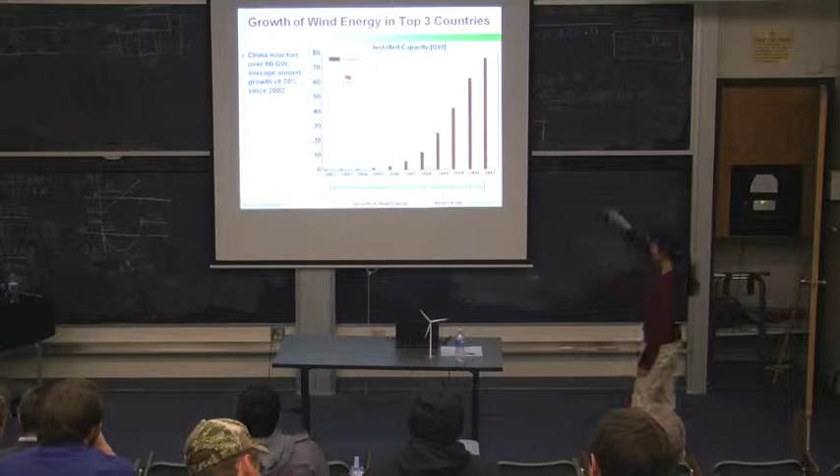Now let's take a look at the top 3 countries in installed capacity. So who knows which country has the most installed capacity? China, yes. So China in 2002 only had about half a gigawatt of installed capacity. They've had an annual growth rate of 70% on average since 2002, and now in 2013 they've exceeded 80 gigawatts of installed capacity. Now, which country do you think?

Excuse me, how do these numbers work out in terms of percentage of the entire power used in the country, or am I stealing your thunder? Oh, so I will get to that in a little bit. Is there a set of data that shows the amount of gigawatts produced per capita, or for solar PV? I don't think I have that data in particular, but yeah, that talks about the density. And China is obviously going to be lower in that regard as well. I'm thinking of the Netherlands, I saw some density numbers and they were pretty high. Yes, so I don't have the density data.

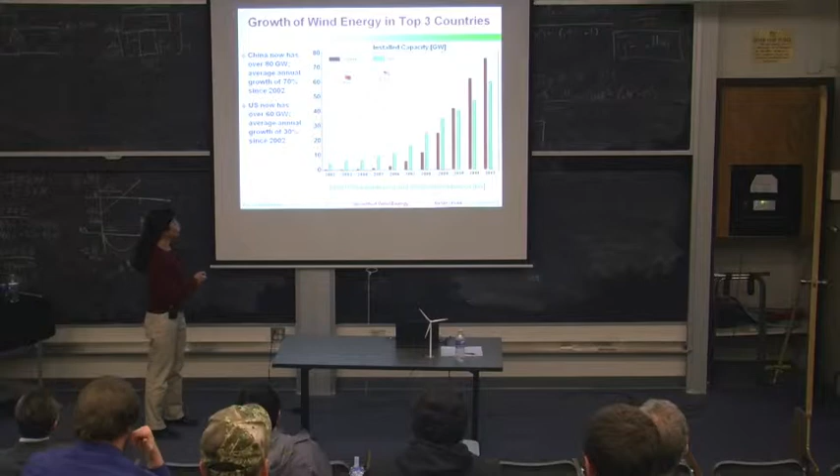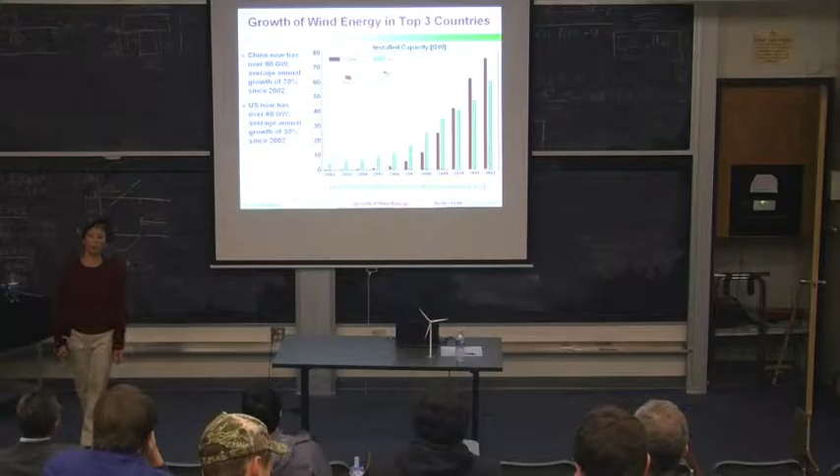Okay, so which country is second in terms of installed capacity? US, exactly. So the US now has over 60 gigawatts of installed wind capacity. We've had an annual growth rate of 30% every year since 2002. So in 2002, we had maybe 10 times the installed capacity of China. We've grown at a slower rate, so China surpassed us in 2010. Now, which country is number 3, do you think?

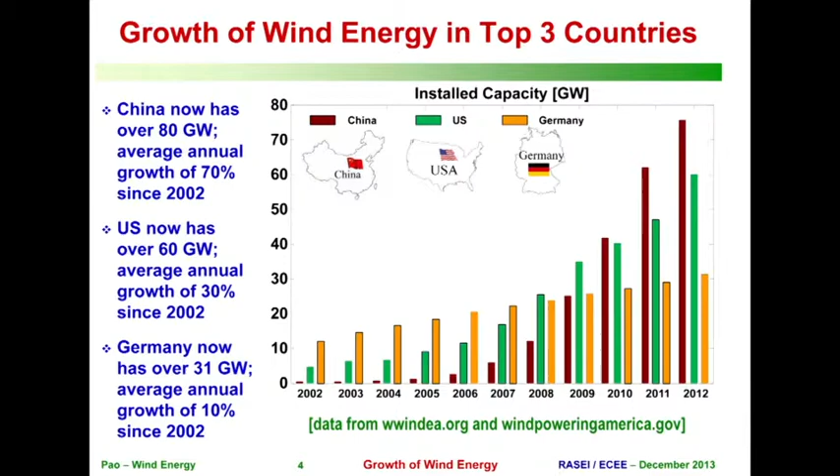Australia? No. Okay. Germany, yes. So Germany has grown still at a reasonably healthy rate, 10% annually since 2002 on average. They now have over 30 gigawatts of installed capacity. They had about 25 times the installed capacity of China in 2002, about 2.5 times what the US had. They've grown at a slower rate since then. So several European countries are like that. They had more installed capacity about a decade ago compared to other countries, and they've grown still at a healthy rate, but not as fast as some of these other countries.

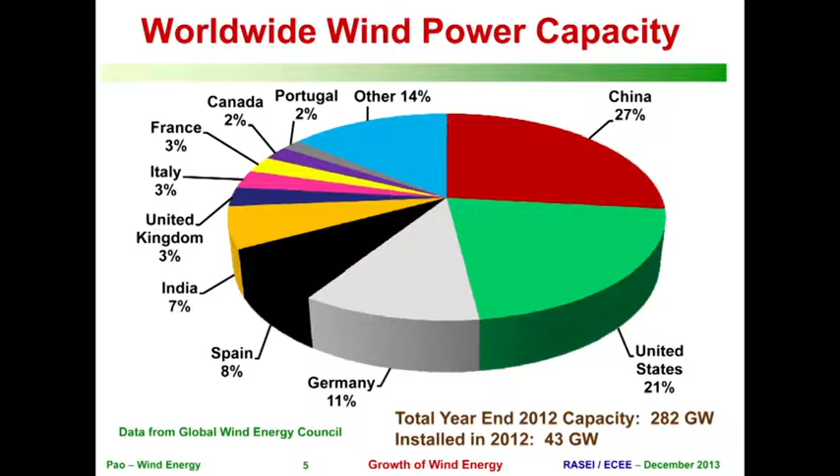All right, so maybe before I get to another way to compare, I think I have one more slide showing more countries. So after China, US, and Germany, we have Spain. India, like China, has seen rapid growth in recent years. A number of other countries in Europe, Italy, where I'll be next week, is about 7th in the world. Canada has had a number of strong years in installations recently as well.

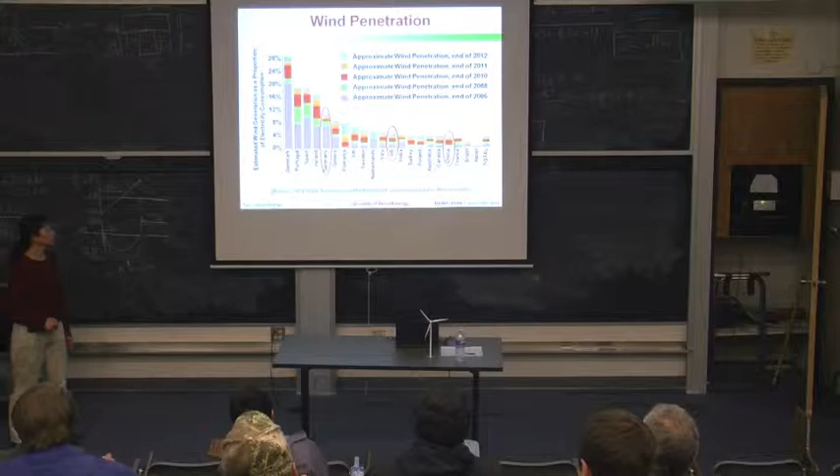So now getting to wind penetration, that's another way to compare countries. Wind penetration is the percent of each country's electrical energy needs that is being met by wind, okay? And in this regard, Denmark is by far the number one country. About 30% now of Denmark's electrical energy needs are being met by wind. Okay, so here I circled the 3 countries that we talked about earlier. China, even though it has the most installed capacity, actually has lower wind penetration. A number of European countries have quite strong wind penetration. The US is at just over 4% right now.

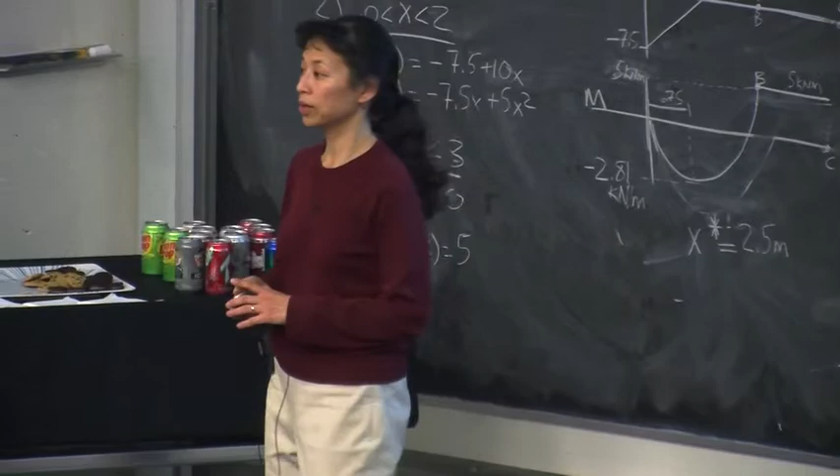Okay, so the wind industry overall is relatively healthy. There has been strong growth in installations worldwide, but the wind industry is continuing to try to drive down the cost of wind energy to try to make it more and more competitive with other sources of energy.

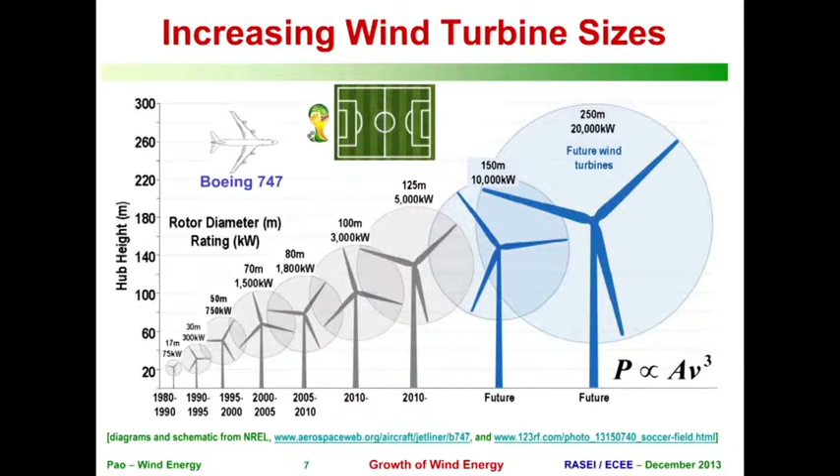So for land-based turbines, the commercial wind farms that are being installed now tend to have 1 to 5 megawatt wind turbines. These larger turbines that are under development are more for offshore wind, because for land-based turbines, in terms of the size of roads and railways, they've really reached capacity in terms of the sizes of wind turbines that they can install. So these larger turbines are being developed primarily for offshore wind.

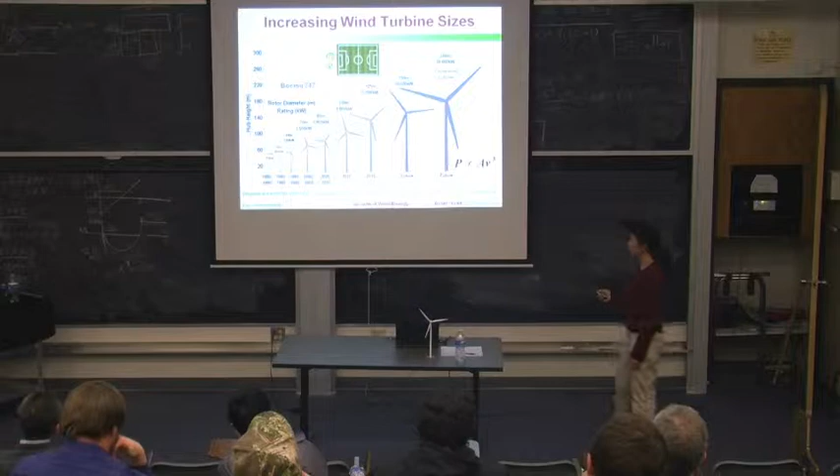Now you might say, well, why are they developing larger wind turbines if they're so hard to transport? Well, the primary reason is that the power available in the wind is proportional to the cube of wind speed, and wind speed tends to increase as you get higher off the ground, so that's one reason to go to higher and higher towers. And the power is also proportional to the rotor area, so that's another reason to go to larger turbines.

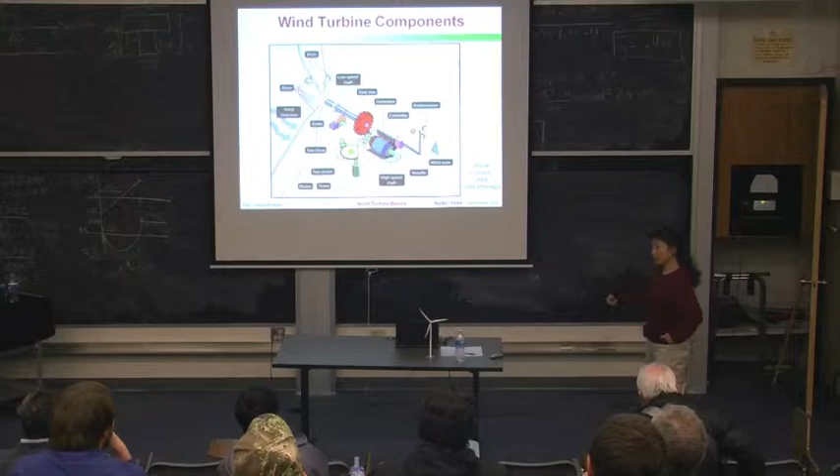All right, so let me just briefly, in a nutshell, explain wind energy. So wind comes into the rotor plane, and because of the design of the blades, that creates lift, causing the rotor to spin. That causes the low-speed shaft to spin, and that typically is stepped up through a gearbox to a high-speed shaft, which will spin the generator, generating electricity.

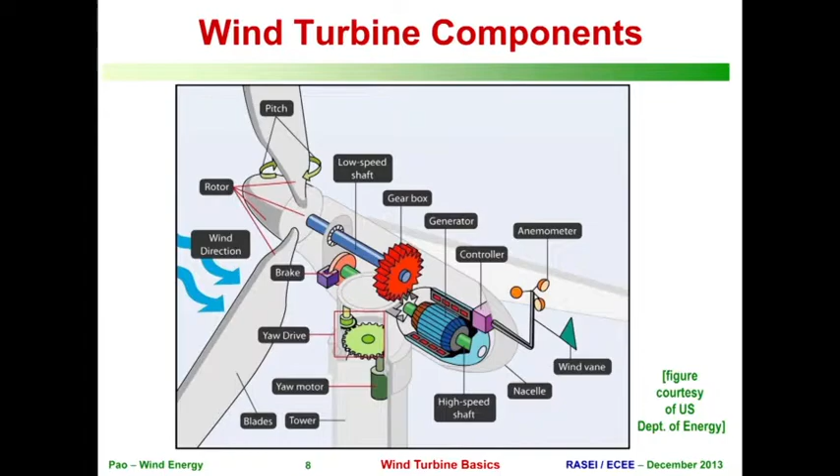So I have a model turbine, which I'll pass around just for fun. So the main components are the base, that's usually a lot of concrete, the tower, and then the nacelle, which sits at the top of the tower and holds the generator, and then the rotor, which includes the 3 blades and the hub at the center. And so this is maybe a 1/200th scale turbine compared to a megawatt wind turbine. I have other ones, yeah.

So Lucy, can your talk cover at all these turbines without gearboxes? Yeah, so I'm not going to talk about direct drive. But Sandy Butterfield gave a very good RASEI talk, which I think was recorded, so it should be online, about direct drive. I'm wondering, for your presentation, are you taking them up? No, I'm not going to talk about that.

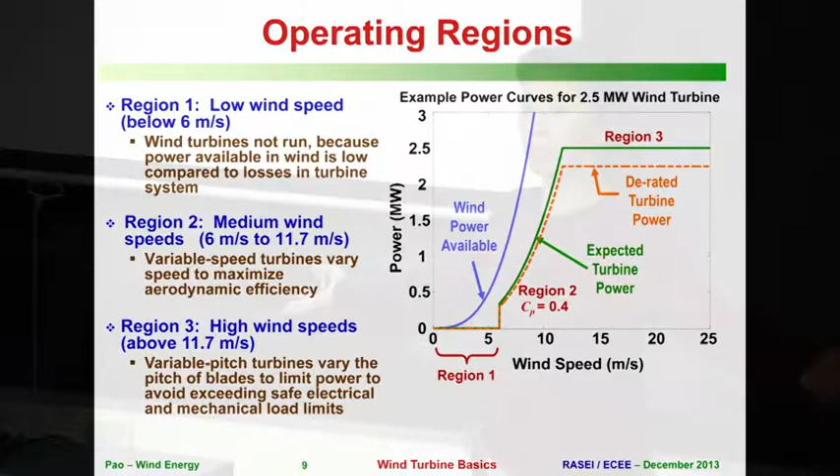Now, as wind speeds continue to increase, we will move into what's known as region 3, or above rated operation. So now once there's enough wind speed, we're generating 2.5 megawatts of power. And we don't want to generate any more power because we'll burn out the generator. And so in region 3, what's done is to pitch the blades to let more of that wind go by. So we're shedding some of that wind so that we can maintain the power capture at the rated power of the turbine.

And we also try to pitch the blades to additionally try to mitigate structural loads on the turbine, to reduce maintenance issues and extend the lifetime of the turbine, all to try to reduce the cost of wind energy. Now, this is typically how wind turbines are operated. So in region 2, you try to maximize power capture. And in region 3, you're regulating the power at that rated power of the turbine.

So effectively, in both these operating regions, region 2 and region 3, you're operating at the maximum power that you can be. So here, you're trying to maximize power, and here, you're at the maximum power, rated power of the turbine. And so the concern with having more and more wind power on the utility grid is that wind turbines typically can't increase their power to help address electrical load issues that might occur on the grid.

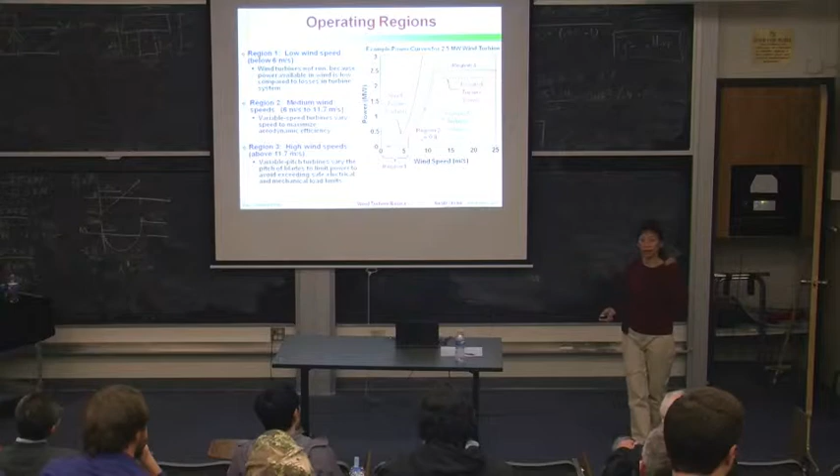And so what I'll talk about later on in the talk is, can we or should we derate the power being captured by the wind turbines so that then there's headroom that allows wind turbines to respond to utility requests for more power to try to balance the grid. Right? So before I talk more about what's called active power control of wind turbines, let me talk about the operation of the utility grid.

I'll first talk about it more generally, and then talk about some of the challenges as we increase renewables, in particular solar and wind, on the grid. And then I'll talk about some of the solutions that can try to address some of the issues. Okay, so just a very brief history of power systems. As power systems were built up, typically there's power that's generated at a power plant, and it's transmitted, often over long distances, to a local power substation, which then distributes the power to the customers.

Okay? Now, most traditional power plants have what are called synchronous generators. And as power systems were built up in different geographical regions, ultimately they were connected for improving the reliability, so that if one region had greater electrical demand, the power systems from other regions could help provide that generating capability.

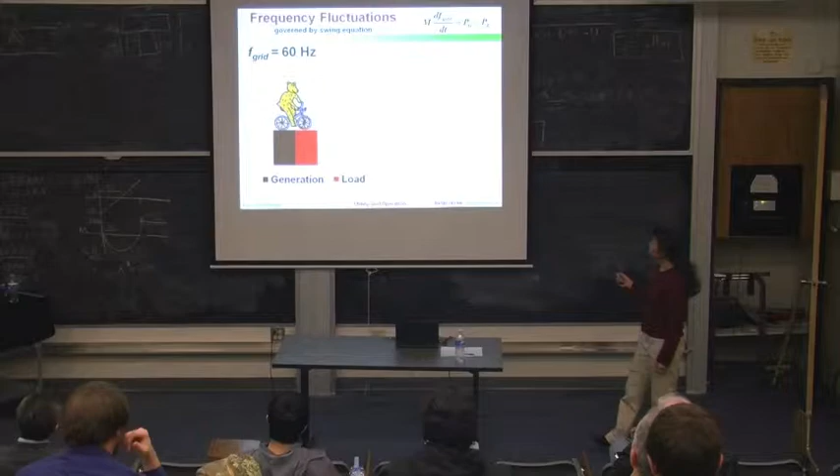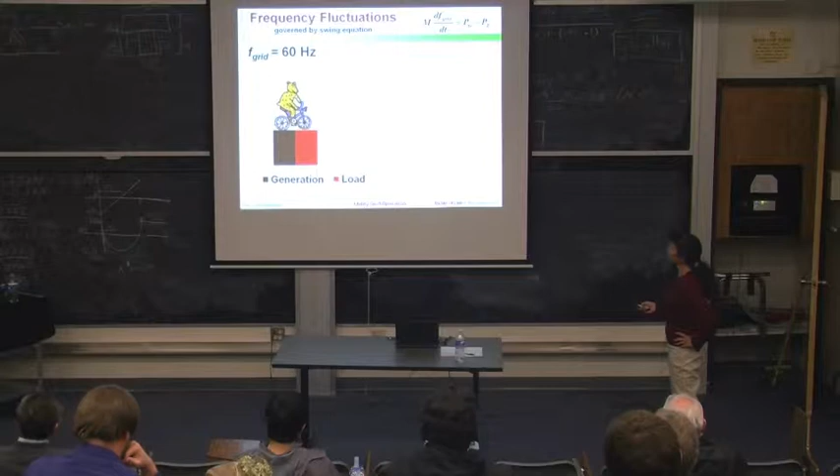So the grid frequency fluctuations are governed by the swing equation. PG is the power being generated. PL is the electrical load. So we want the power generated to equal the electrical load. Okay, so when it is equal, Mr. Conventional Bear is happily pedaling on a flat surface, and the right side here is 0, and so the frequency of the grid is constant at the desired frequency, which in the US is 60 hertz, in Europe is 50 hertz. M here is proportional to the inertia of the system. So we'll talk about that in a bit.

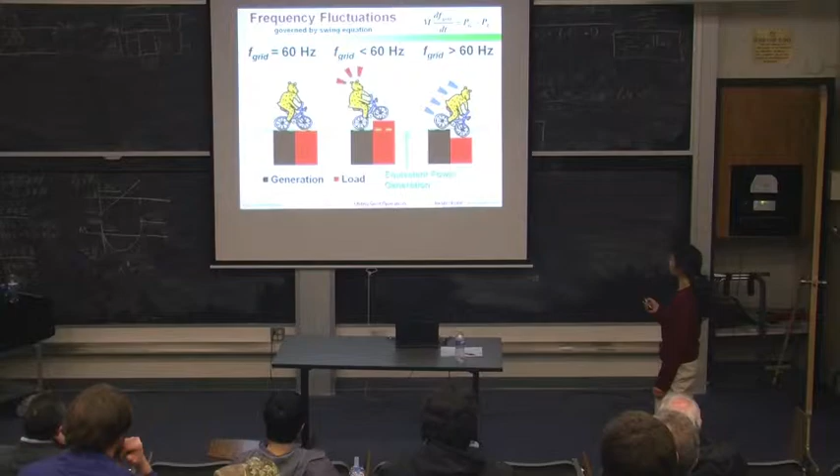Now, if electrical load suddenly increases relative to the power generated, then this right side becomes negative and the frequency drops. Mr. Conventional Bear has a harder time going uphill here, slows down. Now, if the electrical load drops relative to generation, then this right side is positive and the frequency of the grid will increase above 60 hertz.

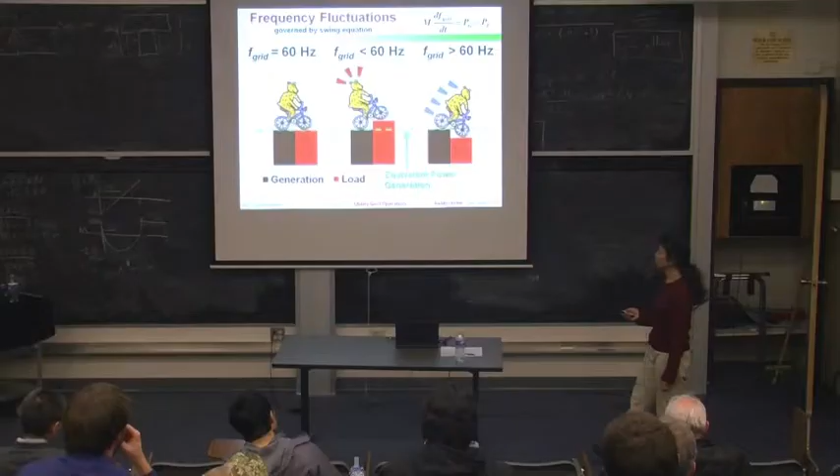Now, it's probably more common that electrical load increases, or sometimes a generating source will have a fault and drop off the grid. And so oftentimes we want to respond to events such as that. So if we have a loss of generation event, PG drops and the grid frequency will suddenly drop.

Now, how fast this frequency drops depends on this system inertia. The larger the system inertia, you can think of dividing this equation by m, so this comes to the right-hand side. So the larger the system inertia, the smaller the magnitude of this slope in this drop of frequency.

Now, primary frequency response is this first period where the synchronous generators, via their governors, provide an automatic response to try to arrest the frequency drop and then bring it back up to some steady state. And this all occurs in about 30 seconds.

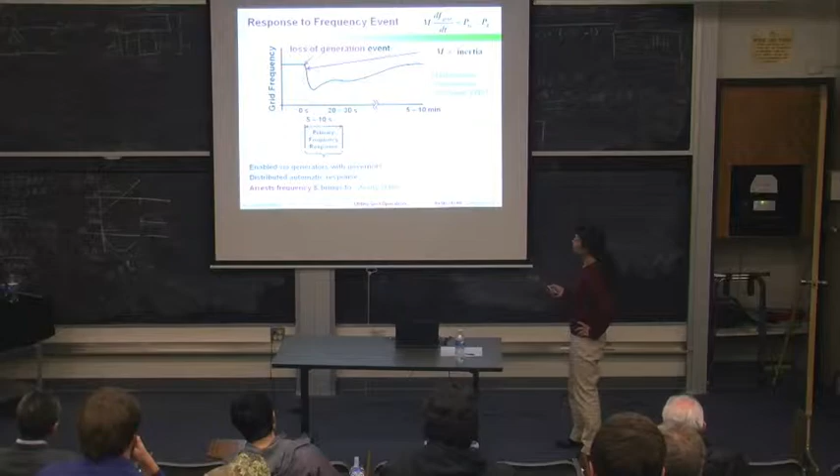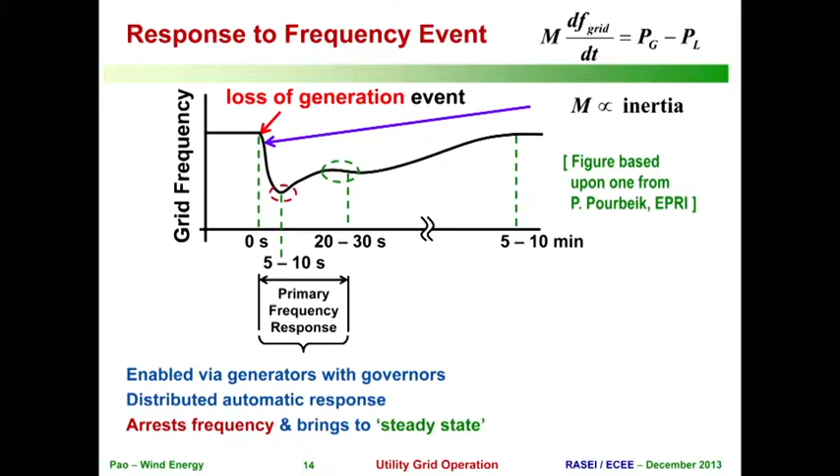Now, once we complete the primary frequency response, then it's transitioned to what's known as a secondary or tertiary frequency regulation period, where there might be automatic power commands generated through an automatic generation control, or manual power commands generated. And the goal here is to bring this frequency back up to the 60 hertz in the US or 50 hertz in Europe.

All right, so let me talk a little bit about primary frequency control and secondary regulation. So in the industry, this is typically referred to as primary frequency response, but in electrical engineering, we talk about frequency responsive systems, and so it can get pretty confusing. And so I like to refer to this as what we're really doing is primary frequency control. So that's how I'm going to refer to that for the rest of the talk. I might also call it droop control.

So we're essentially trying to arrest the frequency drop and bring it back to some steady state here. And this is for synchronous generators provided via governors. And the governor response is characterized by what is called a droop curve. That droop curve is typically fixed for the mechanical synchronous generator machine.

So what a typical droop curve looks like is as follows. This is a plot of the percent change in commanded power as a function of grid frequency. And so if the grid frequency is close enough to 60 hertz within this deadband, then everything is happy. Nothing actually is activated in this primary frequency control.

But if the frequency deviation gets large enough, we move out of the deadband. So in the US, it's common to see deadbands of plus or minus 15 millihertz or plus or minus 30 millihertz, kind of in that range.

And so if, say, we have a sudden loss in generation, grid frequency will drop, and if it drops enough, then we come to this droop region where it's going to command an increase in power from this generator to try to arrest that frequency drop. So essentially it's a proportional control in this region.

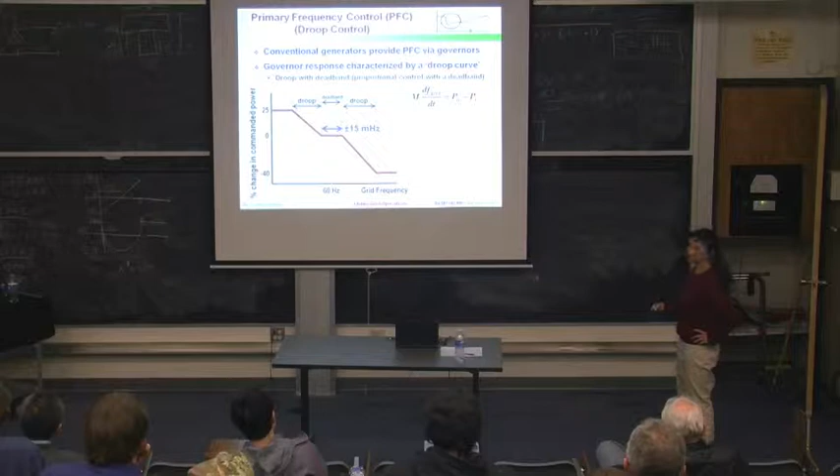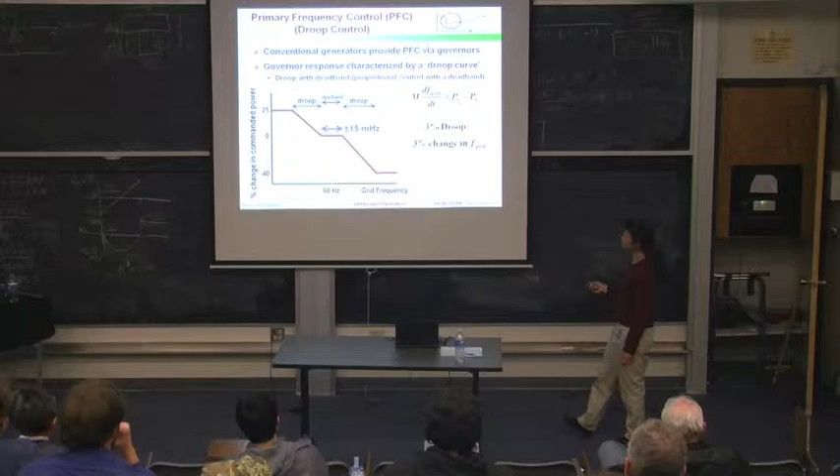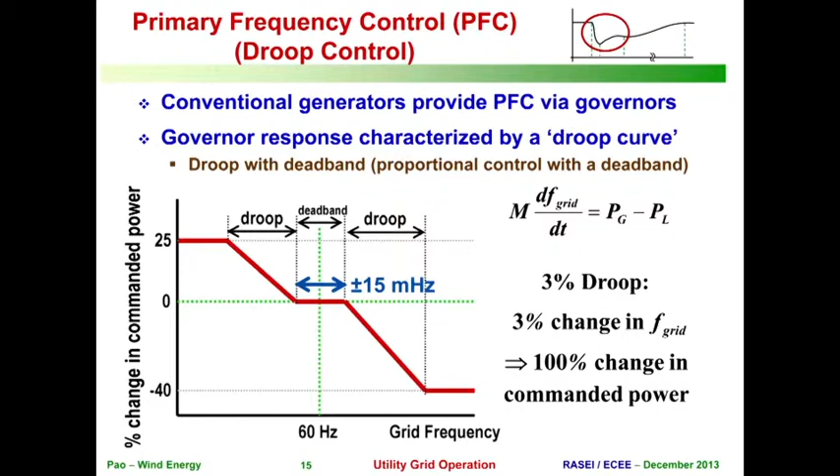So because this is being plotted as percent change in commanded power as a function of grid frequency, the smaller the percent droop, the more aggressive the droop curve. So a 3% droop means that a 3% change in grid frequency leads to a 100% change in commanded power. So if you have a 1% droop, then a 1% change in grid frequency will lead to a 100% change in commanded power. So it's more aggressive.

All right. Now, secondary control is a little more complicated to explain. There are many different ways, and different details in different utility systems. So I'm not going to go into as much detail here. But the goal here is that after the primary frequency response, we want to bring the grid frequency back up to 60 hertz, say, in the US.

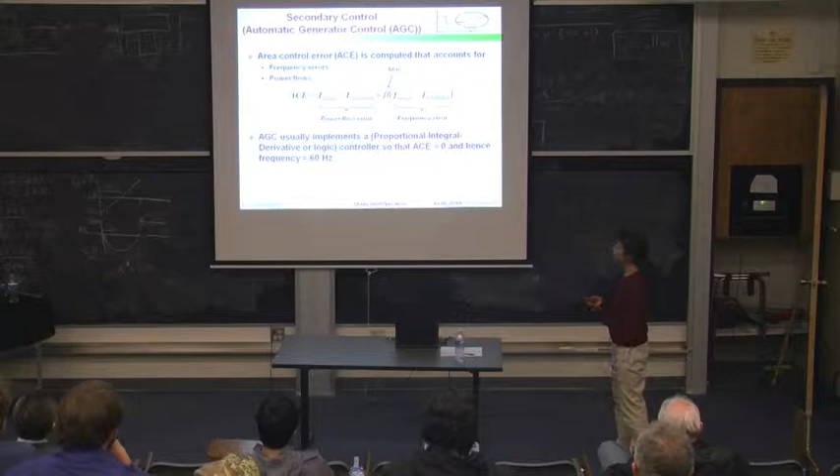And what's typically done is, based on measurements, an area control error is computed, and it's a function of frequency errors as well as power flows. And so this ACE signal is a function of this frequency error. Beta is a gain that's often referred to as a frequency bias. And this is the actual interchange power flow, and this is the scheduled interchange power flow. And so if there's an error there, that's accounted for in this area control error.

And so the automatic generator control generally implements a pretty simple control algorithm, often a proportional integral derivative controller or a logic controller, to drive this ACE signal, the area control error signal, to 0. And so that will essentially drive the frequency to the desired frequency of 60 hertz. Usually, the automatic generator control sends a new regulation power command every 2 to 4 seconds.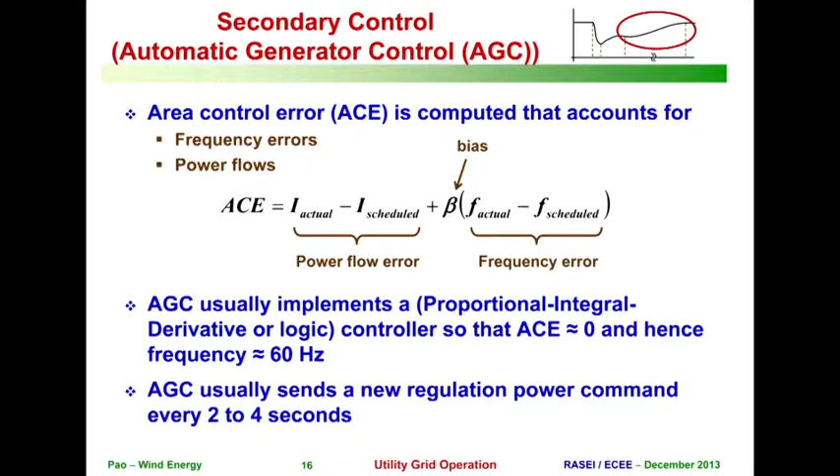Right? So to recap then, we want electrical generation to be equal to electrical load. And traditionally, what's done is the electrical generation is controlled to follow the varying load. The utility typically doesn't know when you're going to use your different appliances or lighting, or when that factory is going to go into full production and such. And it's just trying to adjust generation to meet varying demand.

So in order to do that, it has to have some operational reserves. It can't always be operating at maximum output. Okay? And if there's imbalance between electrical generation and load, that will lead to frequency variations on the utility grid. If there are large imbalances, that will lead to large frequency fluctuations, which can lead to unwanted under-frequency load shedding, so just dropping electrical loads, or even blackouts.

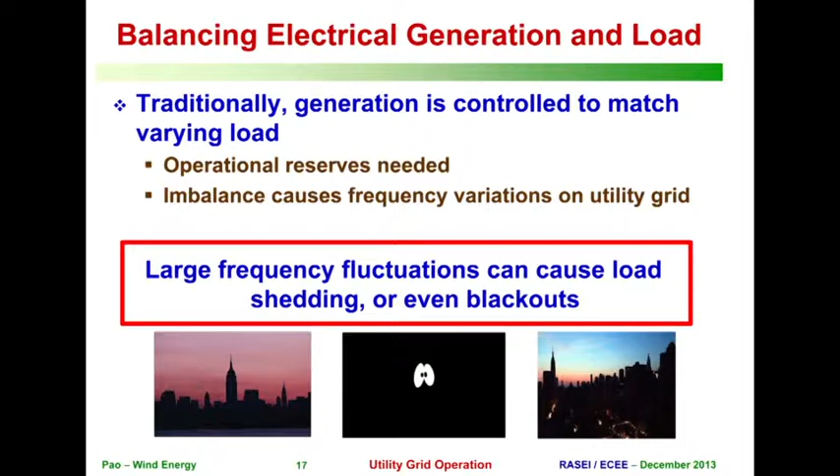All right, so now let's take a look at how utility grids try to vary generation to meet load. So a typical system load across a 24-hour period, across a day, might look like this. From midnight to 5 a.m., there's not as much load. And then as people get up, turn on their lights and appliances, there's more load during the day. And then in the evening, as people go to bed, load drops again.

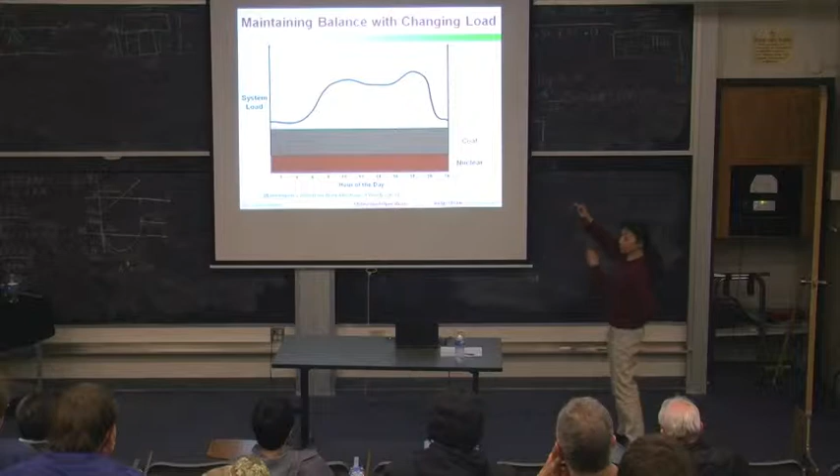So a lot of utilities might have some amount of nuclear, which they operate. They might have some amount of coal. Okay, so ideally, they'd like to just have nuclear and coal be operating at some fixed rate of energy production. There might be some hydro, and then oftentimes gas is the most flexible, so that's the one that gets cycled up and down to try to meet increases and decreases in demand.

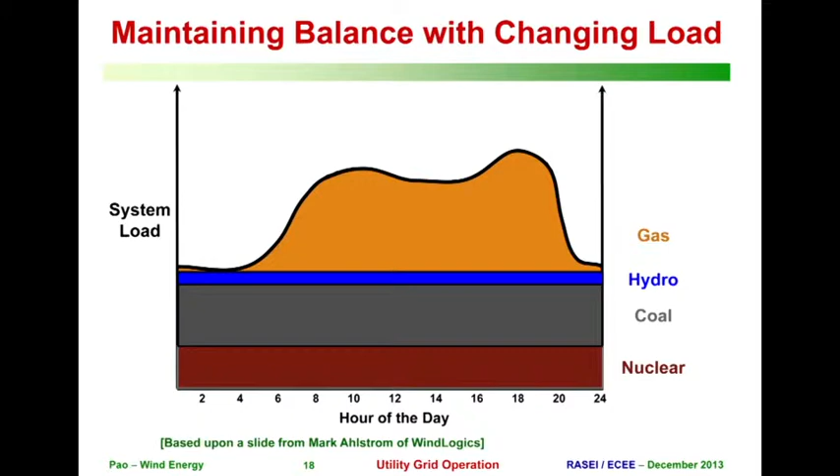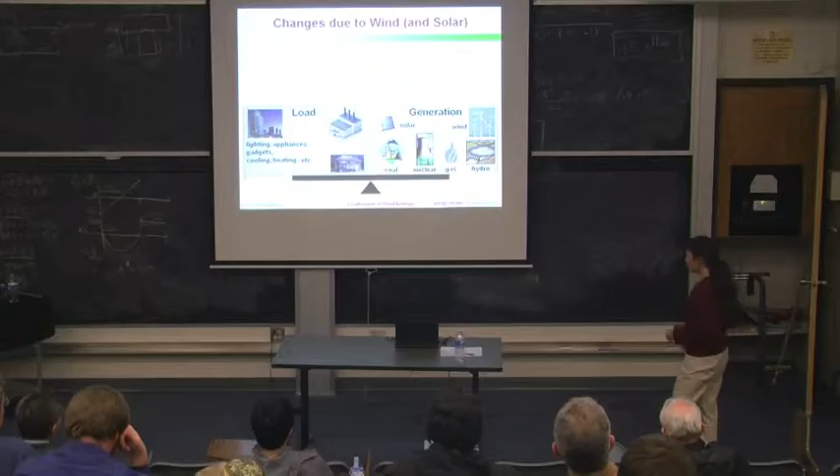Now, what happens when we have increasing amounts of wind and solar in the generation mix? Well, wind and solar are intermittent generating sources. Wind energy is only available when the wind blows. Solar energy is only available when the sun shines. And so people are worried that as more and more wind and solar are integrated onto the utility grid, these intermittent sources are hard to predict, hard to control. It's going to be harder and harder to control this generation mix to meet variable load. Okay?

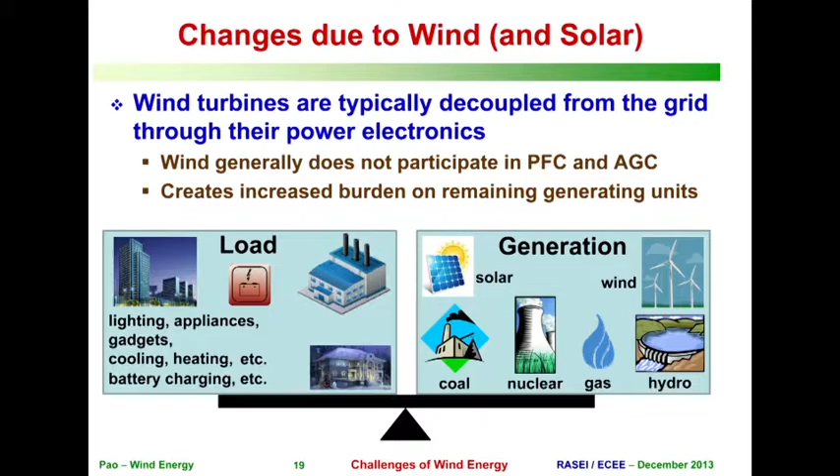And wind turbines typically, and similar can be said about solar, are decoupled from the utility grid through their power electronics. So they're usually not asked to provide primary frequency control or secondary automatic generator control. And as such, as more and more wind and solar are added to the generation mix, the remaining traditional sources are asked to do more and more of the balancing work. So the remaining sources of energy are becoming a smaller and smaller percentage of the generation mix, but yet they're still asked to do all that balancing. And so there's worry that it's just going to be too hard to balance generation with load.

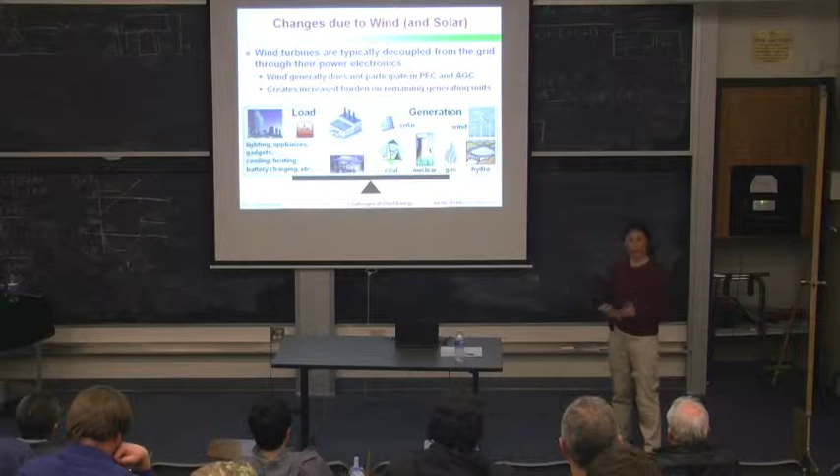In particular, also, if we look at more and more electric vehicles on the grid and the peak demands that might come about. So as there are more electric vehicles, say 1 million electric vehicles, at the end of the day, people have commuted to work and back, they all plug in their electric vehicles, and there might be this sharp increase in load that might be difficult to meet. And so there are concerns over the reliability of the utility grid from many different viewpoints.

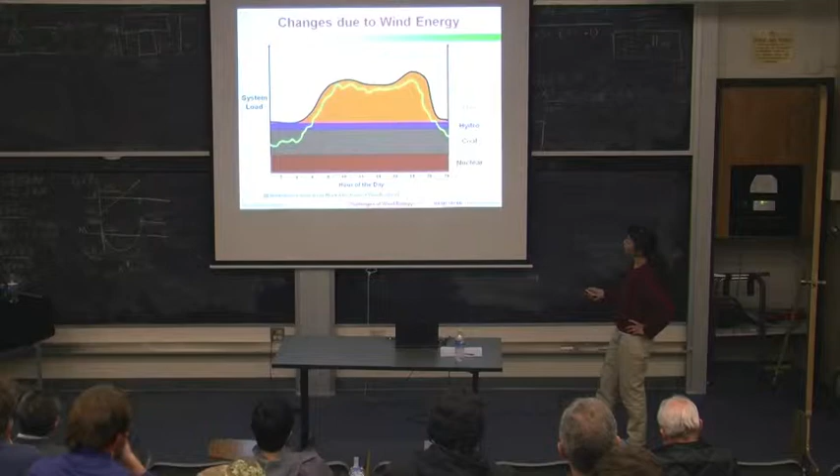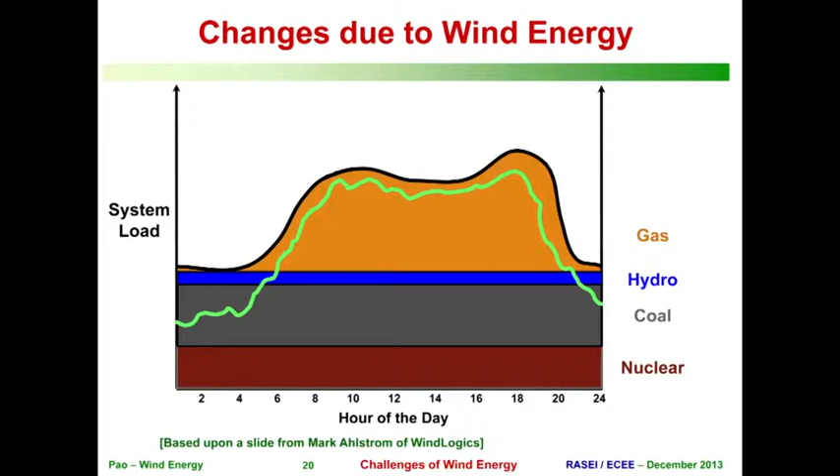Okay, so if we look at what we had before, wind typically blows harder at night in most regions around the world, and so there's a bigger decrease here and maybe a bigger decrease in the evening, and maybe less so during the daytime. And because of this decrease, now we're asking hydro to cycle, and we're also asking coal to cycle, and if we increase wind penetration further, we might ultimately need nuclear to cycle. And so this is some of the concern, that it's difficult for coal to cycle rapidly to respond to changes in system load.

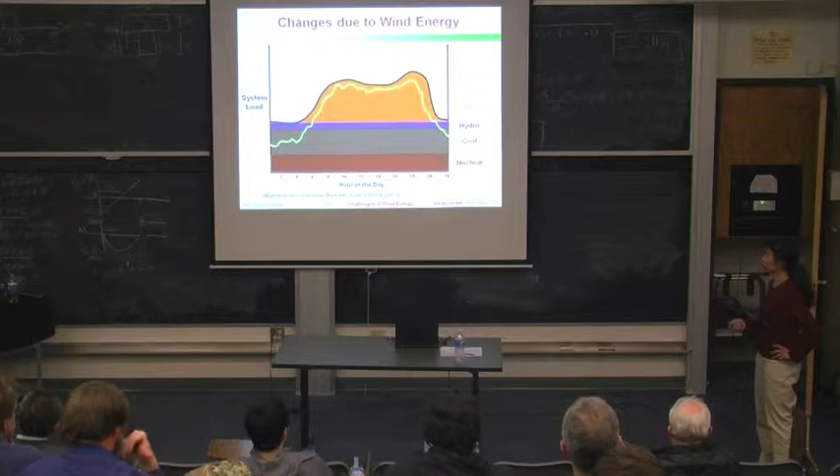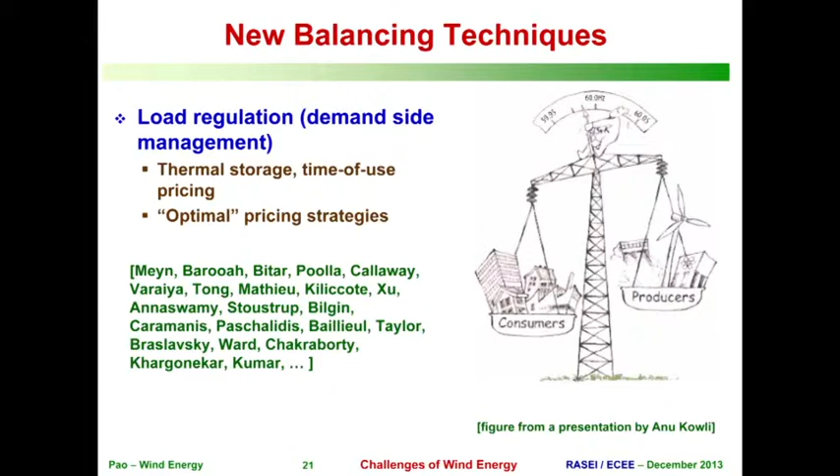All right, so what are some methods that we can try to address these issues? So one method is to try to do load regulation, or what's also called demand response or demand side management. Essentially, kind of predict what might happen during the day. So if it's predicted to be a really hot day in the summertime, you might, while it's still early in the morning and not a lot of demand, you might start to cool down buildings more than you would at that time of day, but just use that thermal inertia of the building, cool it down.

Most people can't feel the difference in a few degrees, and so then the air conditioning might not be required during the peak part of the day, and so that helps then to reduce that peak demand and help the reliability of the grid. There's a number of people in our field that have looked at demand side management, time of use pricing, and they've also looked at optimal pricing strategies so that users will do the right thing and try not to increase the electrical load at what would otherwise be extreme peak times.

Another way to try to address some of the issues of increasing renewables in the grid is to try to develop effective energy storage techniques. Unfortunately, at the current time, the most effective electrical energy storage methods are really expensive, so it's not really being embraced as the solution just yet. People in our field, there are some that have looked at better modeling and control of storage options, also looking at where do you place the storage at different locations on the utility grid for maximizing effectiveness.

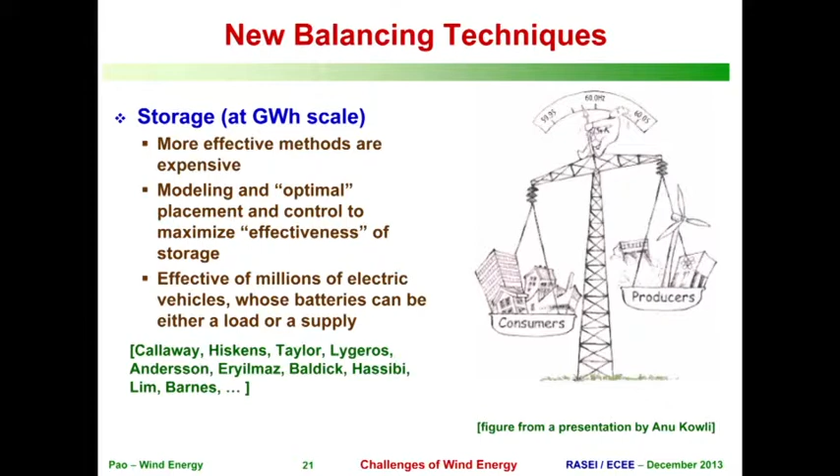They've also looked at, suppose that we do have 1 million electric vehicles. While it can be viewed as a load, they all have batteries, so they can also be viewed as a supply. And so how can we, if we had smart meters and distributed controllers on these electric vehicles as they get plugged in at the end of the day, as long as the user doesn't care about their vehicle being charged until the next morning, then let the utility decide how to charge that vehicle, possibly drawing energy from the vehicle if needed, when the user doesn't necessarily need that energy.

And finally, what I'd like to spend the next little bit talking about is active power control of wind power plants in particular. And you could do the same for solar as well. So the idea here, I already alluded to earlier, is that instead of operating wind turbines and solar at their maximum power capabilities, let's derate them, say, to 90% or some level, so that we leave ourselves some headroom so that we could increase power or decrease power to respond to utility grid requests to help balance the needs there.

So there's been more work that has been done in developing active power control methods for wind turbines. It's a relatively newer area of research in the solar community, but Professor Maksimovic and Andy Hoke are actively looking at active power control of solar as well.

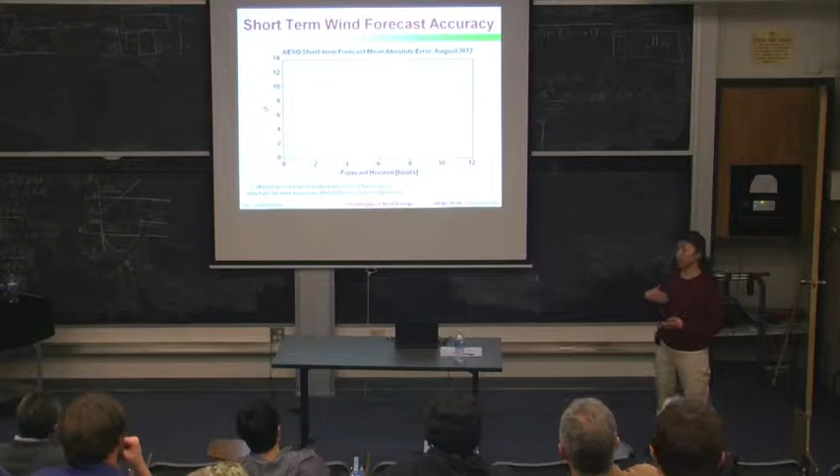Okay, so before I talk more about active power control of wind in particular, I just also want to make a brief comment that wind forecasting has been improving. This is largely being done by the atmospheric science community, and they have been developing better and better methods of wind forecasting such that, as these utility grids change the way that they operate to be more flexible in planning sort of 5 minutes ahead, in shorter time increments ahead, that, along with better forecasting, will mean very accurate forecasts and better reliability in terms of scheduling wind that will actually be available and be provided.

Okay, so let me now talk just a little more about active power control of wind turbines. Can we actively control the power of wind turbines, not always to be at the maximal level, but to be at some lower level, and then can we control the power of wind turbines to follow a desired power reference so that we can help stabilize the grid and possibly make it more reliable?

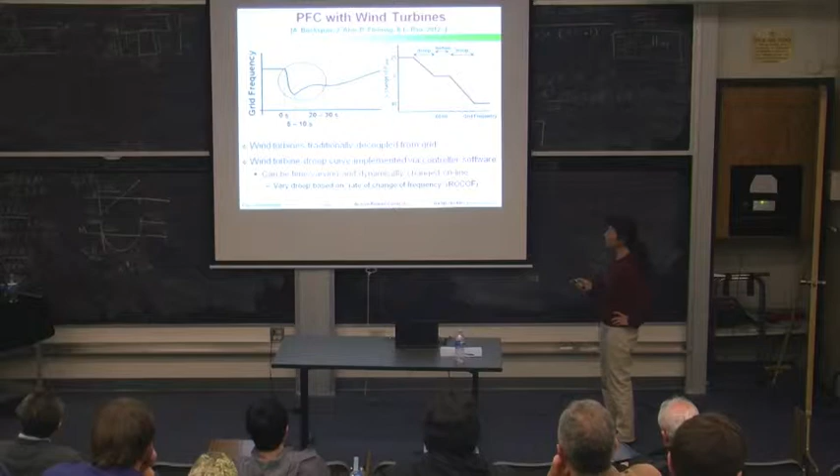Okay, so wind turbines, as I mentioned, are traditionally decoupled from the utility grid, so they're typically not asked to provide primary frequency control or secondary regulation. But with wind turbines, we can implement a droop curve synthetically via software and ask a wind turbine essentially to respond to frequency deviations. Okay? Now, in fact, for wind turbines, we have more flexibility. So with synchronous generators, they typically have a fixed droop curve that's tied to the physical characteristics of that synchronous generator. But for wind turbines, we can design different types of droop curves.

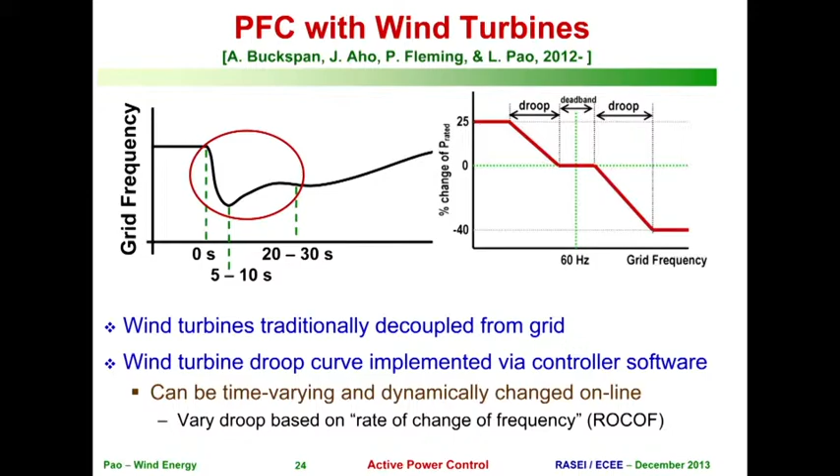In fact, what we found is dynamic droop curves, time-varying droop curves that change their characteristics over time, in particular as a function of the rate of change of frequency on the grid, tend to actually be very effective. So just as an example, if the rate of change of frequency in the grid is 0 or very little, we might use a very

non-aggressive droop curve. So here we have two static droop curves. Static droop curve 1, which is this red curve, is less aggressive. It has a 5% droop with a 50 millihertz deadband. And then we have a more aggressive droop curve, static droop curve 2, that has a 2.5% droop.

And what we do for our dynamic droop curve is we interpolate between the two based on the rate of change of frequency. So if the rate of change of frequency is 0, then we use the less aggressive droop curve. And if the rate of change of frequency starts to increase in magnitude, so it becomes more negative here, so we have a drop in frequency, then we interpolate between the two static droop curves to generate our dynamic droop curve response, and we can go more and more towards the more aggressive droop curve depending on this rate of change of frequency.

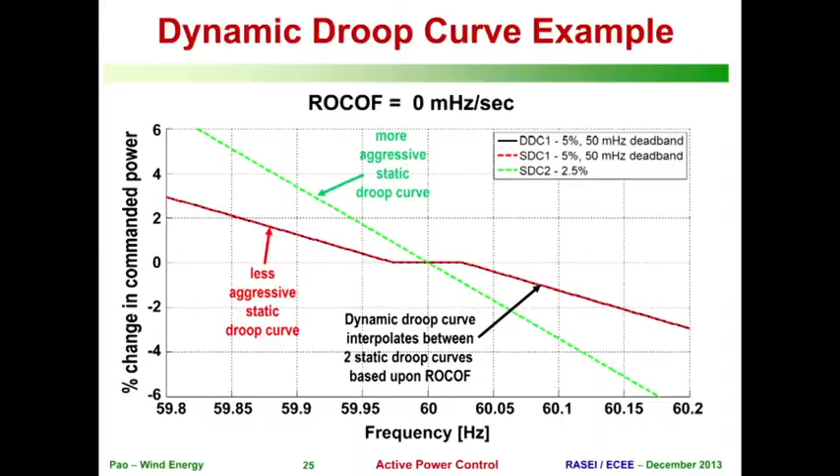So what are you controlling to change the droop curve? The pitch of the blades? So the droop curve takes the frequency input. If the frequency drops, then we will have a commanded power. That commanded power is sent to our control system for the wind turbine, and we change both pitch and generator torque to try to follow that power reference.

If the power reference is not changing too rapidly, we can typically follow that just with pitch alone. If the power reference changes more rapidly, generator torque has a faster response, so then we'll use that to follow the power reference. All right.

Mike? So you went to the 50 millihertz deadband. Do you have that degree of freedom? Yes, we do have that degree of freedom in terms of what we're asking out of our wind turbine. But the grid doesn't constrain you? The grid doesn't constrain us. Usually for synchronous generators, there's just some fixed droop that's tied to the physical characteristics of that synchronous generator. For wind turbines, they're typically decoupled from the utility grid due to their power electronics, but we can ask them to provide a primary frequency response through a synthetic droop curve, essentially.

So we've run grid simulation results to see how well wind turbines can respond to grid events using a dynamic droop curve. Here we use an IEEE standard grid model. In the simulation, 5% of the generating capacity suddenly drops offline at time equal to 1,000. So when there's no wind in the mix, this is the response, with all conventional generating sources.

Now, if 15% of the utility generating sources is now wind, but wind, as it traditionally has, does not participate in primary frequency control, then we actually have a worse response. The frequency drops to a lower nadir and comes back to a steady state that's further away from 60 hertz. This makes sense because only 85% of the generating resources are trying to respond to this grid event. Wind is not trying to help there.

Now, if we let wind participate with the dynamic droop curve, then we can actually do better than when there was no wind on the grid. So we're arresting the frequency earlier and bringing it back to a steady state that's closer to 60 hertz. And this then leads to the secondary control having an easier time.

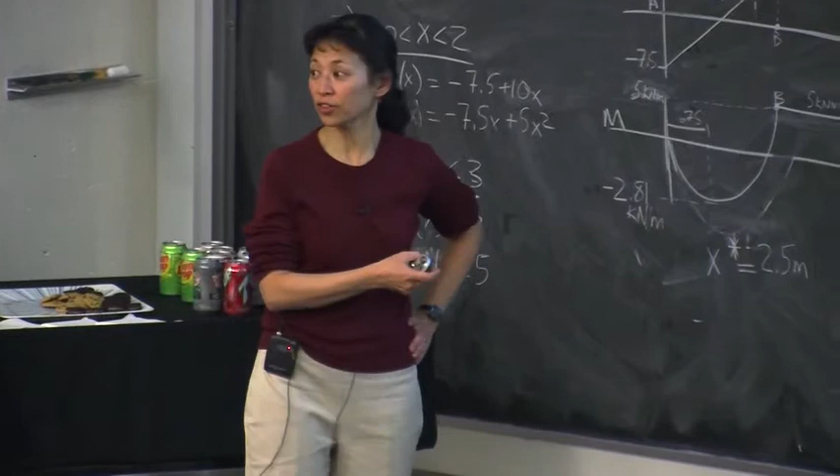One more. To give me some sense of how significant this improvement is, can you quantify what is the negative impact of 100 millihertz or 200 millihertz droop from the 60? Right. So it depends on the particular grid and the utility, the generating mix on it, in terms of how low is too bad. But typically there's some threshold below which you'll have load shedding, and that might lead to blackouts. So there's almost a catastrophic change.

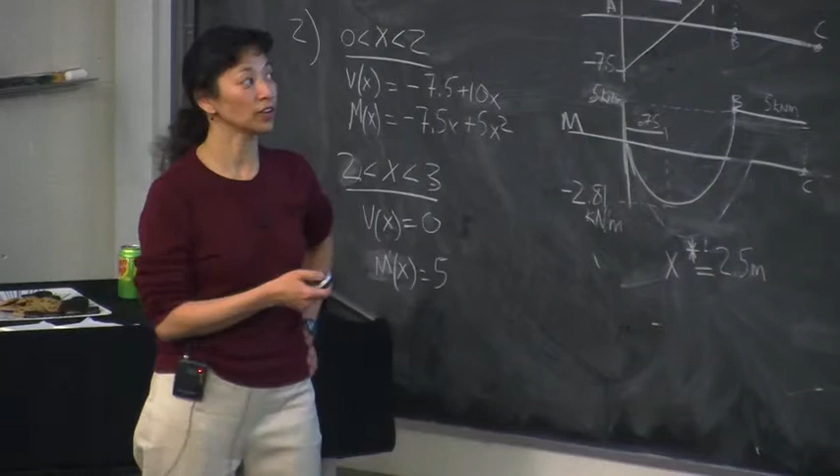Yeah, so there's definitely some threshold at which point there is a catastrophic change. And so you want to arrest this as much as possible. And this is significant enough with respect to that. Right. And this is only 15% wind penetration. What we found in more simulations is higher penetration of wind participating will actually lead to even better response.

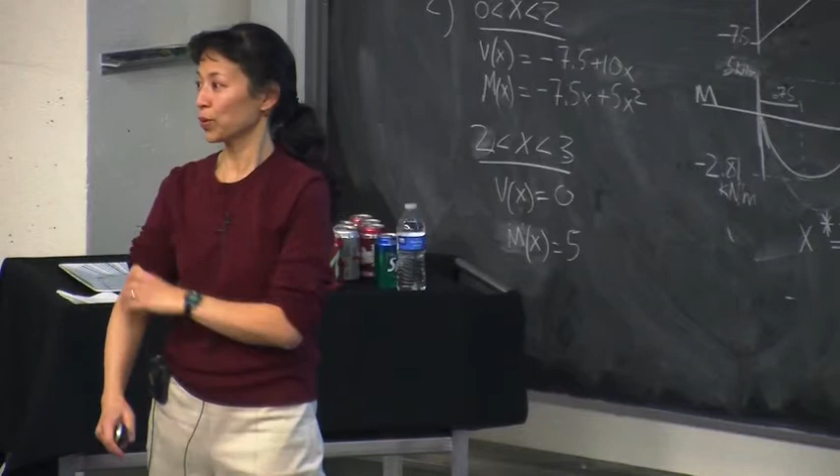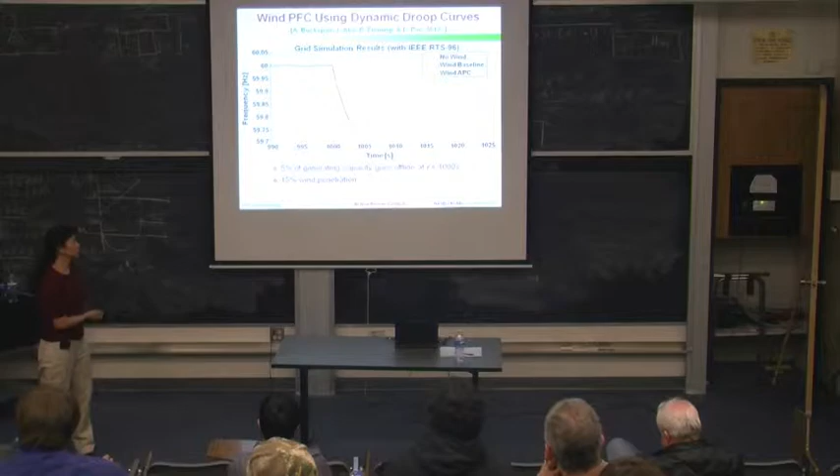Okay? So when we did these grid simulations, we were very excited. But one thing we had worried about is we're asking our wind turbines to respond to these power reference requests and possibly asking them to pitch more and do more. We were worried that that would lead to larger structural loads, and so we thought that might end up being the cost of providing the service. But it turns out that in general, the structural loads are actually decreased.

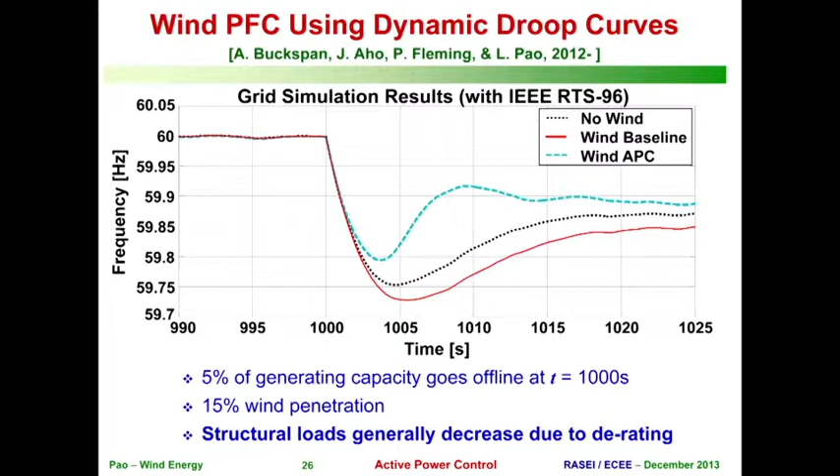Because most of the time, you're going to be operating at a derated operation, so you're going to have lower loads than usual. And only occasionally, when these events occur, are you asking them for more. So at maximum load, you have the optimal angle of attack where you have maximum lift, and that also means maximum force on the structure, and you back off from that. We back off a little bit, so we have lower loads in general in that derated operation. And only when we're responding to events are there occasionally slightly more loads.

Yeah, Frank? Yeah, but I'm a grid operator, and I want to get paid for every watt I can generate. Yes, so that's an issue, right? So you derate to 90%, you're going to get less revenue for the power production. And so this is definitely an issue going forward, because right now, generating sources are not paid for providing responses to grid events. And so in the future, I think the incentive should be that they are paid for providing the service. And then that could even it out economically.

I have a similar question. Do these droops actually happen often enough that it's justifiable to derate your wind turbine full time so that you can compensate for these droops? So that's another good question. You could try to predict when there might be a peak demand. And so you might run closer to maximum power most of the time, and then if you predict that you might need that headroom, then you derate, so you're only derated for some shorter amount of time before events.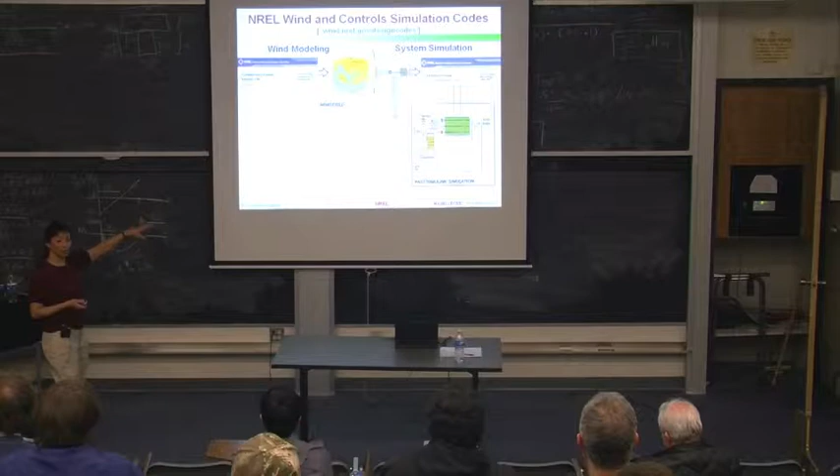All right, so moving forward. I just showed some grid simulation results. We have done detailed wind turbine response results as well to assess the typical structural loads incurred when providing derating, primary frequency response and secondary response. We use NREL's codes to help us evaluate wind turbine response. These codes are freely available to anyone that wants them.

They have a TurbSim code that generates realistic wind fields, which we can then pass through the wind turbine in another code known as FAST, for fatigue, aerodynamic structures, and turbulence, that simulates the turbine response with medium fidelity. There's a nice interface through MATLAB Simulink to enable us to test out different controllers relatively easily. We haven't used this newer code, which is a simulator for offshore wind farm applications. It's much higher fidelity and more computationally intensive, but it simulates the wakes and the interactions among turbines on a wind farm. Ultimately, we would like to test that out at the wind farm level.

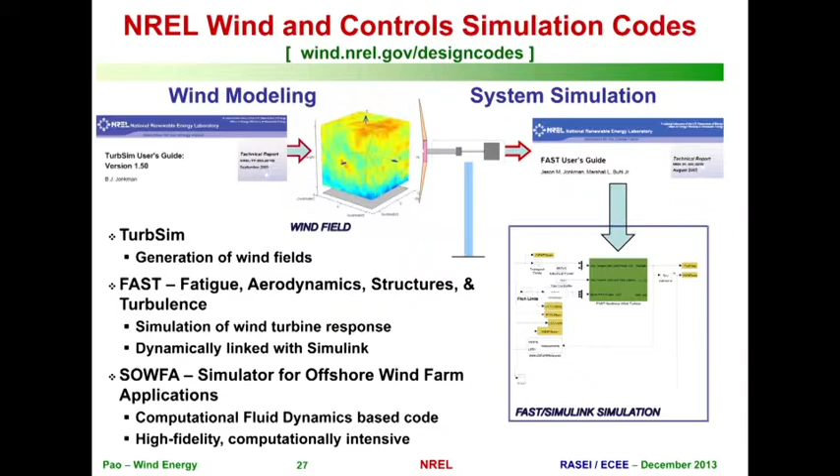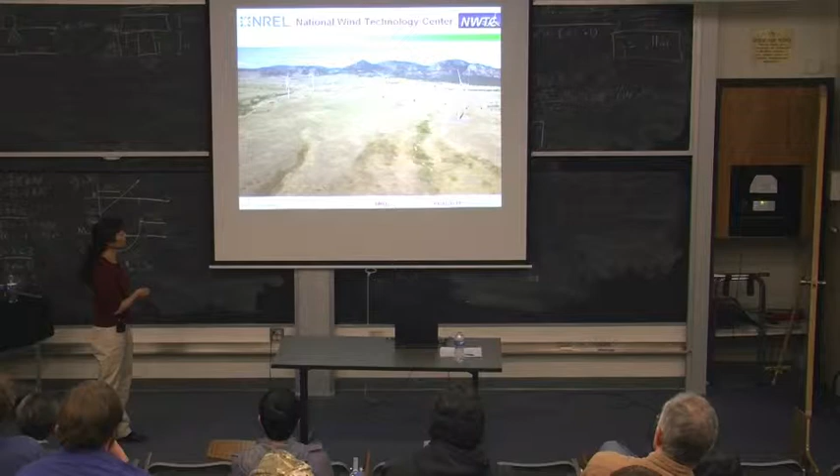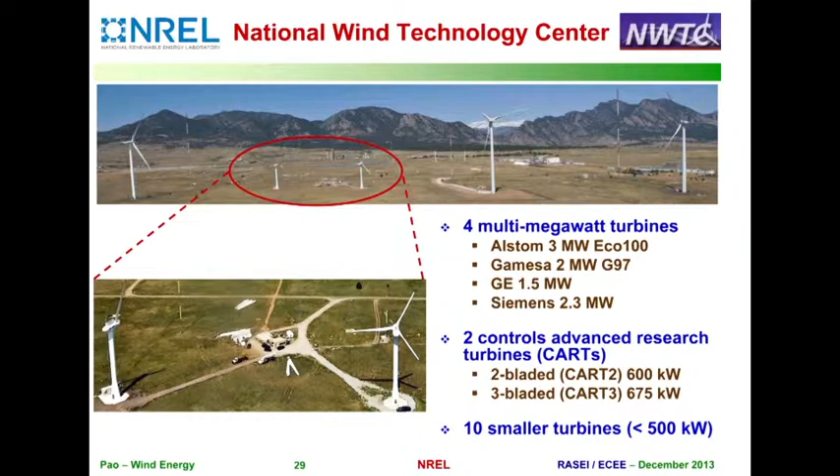Besides the primary frequency control work, we have done some secondary regulation work, and we have had the opportunity to implement our active power control algorithm on the three-bladed 675 kilowatt research turbine at NREL. NREL is just south of town here, the Wind Technology Center. There are 4 multi-megawatt wind turbines, and there are 2 CARTs, Controls Advanced Research Turbines. Last wind season we got to test our active power controller on this wind turbine. This season, we're testing it on this turbine because there's additional instrumentation that will allow us to measure winds upstream approaching the wind turbine.

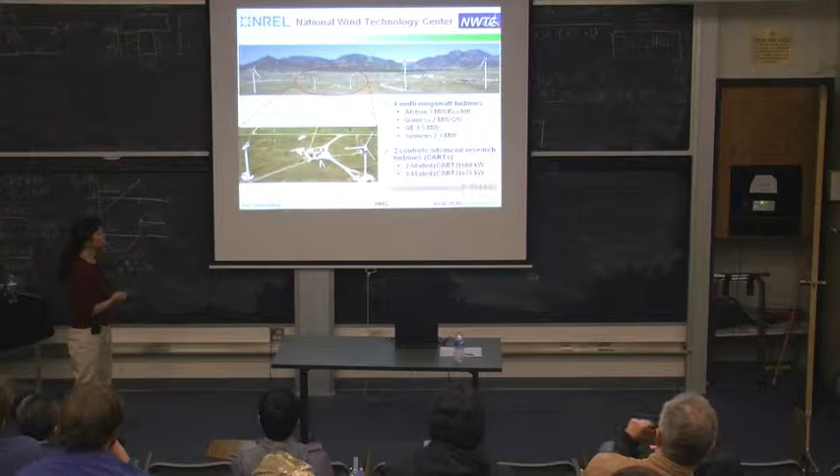So to show some of our results, maybe before I get to that, we've changed the way that wind turbines are controlled. They're not always trying to maximize power, so we've completely changed the controller for them. And so we have done a stability analysis of some portions of our new controller. We've also looked at secondary control. We've combined primary frequency control with secondary control methods, and we did a field test last season on the CART 3, so these are actual experimental results.

Ideally, the grid frequency deviation is 0. We actually take frequency data from ERCOT, the Texas grid. So these are actual grid frequency data that we use as input to our controller, and this grid frequency will generate a power command.

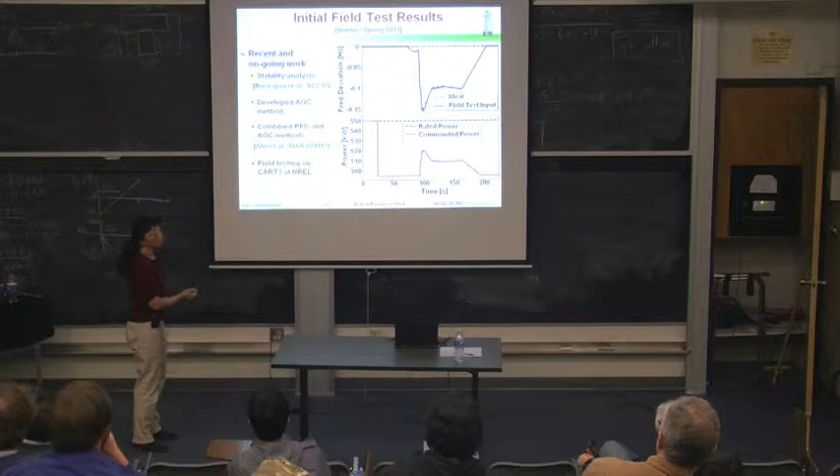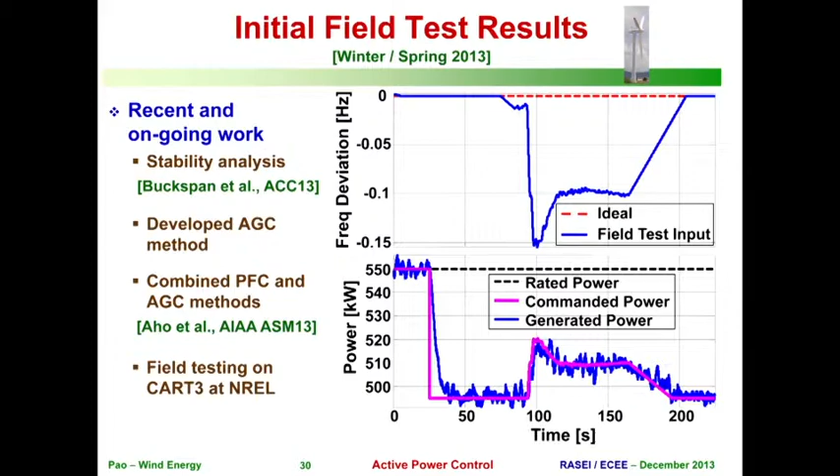For the CART 3, this is the rated power, and at some point, you might say that we can predict some event about to occur, so we derate down to 90% of rated power. Then when the grid event actually hits, it asks for more power to try to balance the grid event. And this generated power follows the commanded power quite well. In this coming season, we're going to be testing on the other wind turbine using additional instrumentation and some modifications to the control algorithm.

So in terms of ongoing and future challenges, what we've been looking at so far is active power control of a single wind turbine. How can we control a single wind turbine through the pitch control and the generator torque control to follow essentially arbitrary power reference commands.

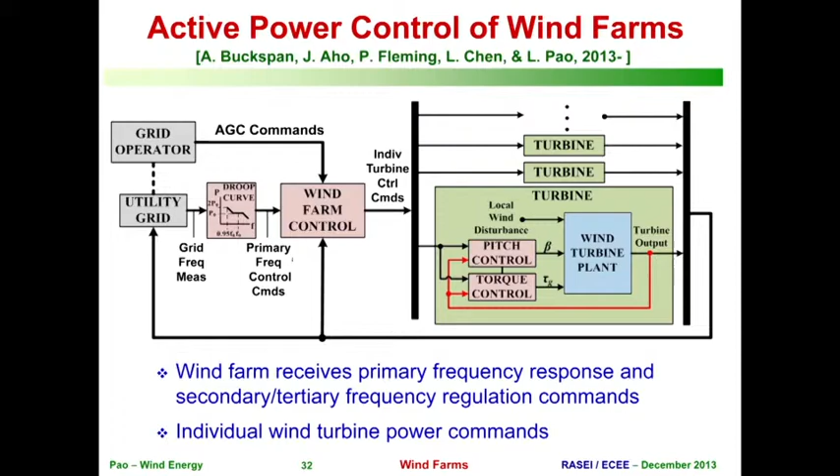Ultimately, we'd like to expand this out to the wind farm level, to the wind power plant level. So if a wind farm receives primary frequency control commands and secondary power commands from the grid operator, then how do we take that overall wind farm power command and divide it into all the individual wind turbines on the wind farm? It's probably not going to be just the total power command divided by the number of turbines, because the wind turbines actually do interact through their wakes.

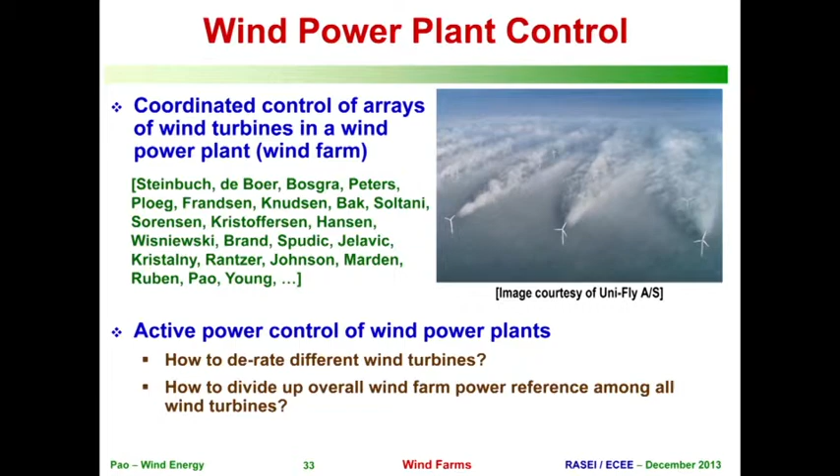So if the lead turbines take out a lot of power, then they generate a wake, and that leads to more turbulence, more structural loads on the rear turbines, and there's also less wind power available for the rear turbines to capture. And so we need to better understand how wind turbines interact with one another to actually appropriately divide out that power reference command to the wind farm to the individual turbines on the wind power plant.

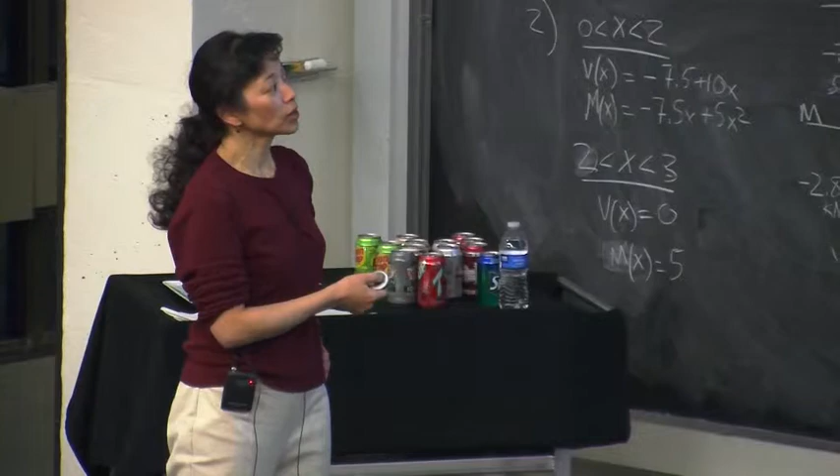So there has been work by systems and controls researchers looking at coordinated control of arrays of wind turbines on a wind farm to try to maximize power capture, which has been more of the work, but also to some extent to try to minimize structural loads on wind turbines. And so this is a very complex problem, and a lot of these initial algorithms that have been developed use very simplified models of the wake interaction among the turbines. And so going forward, we need to understand that better and incorporate that knowledge to improve the distributed or coordinated control of wind farms.

As we get to expanding to active power control of wind farms and wind power plants, taking into account the wake interactions, there are questions of, how do we derate the different wind turbines? We might not want to all derate them to the same level. So how do we decide that? And how do we divide up that power reference command coming in to the different turbines?

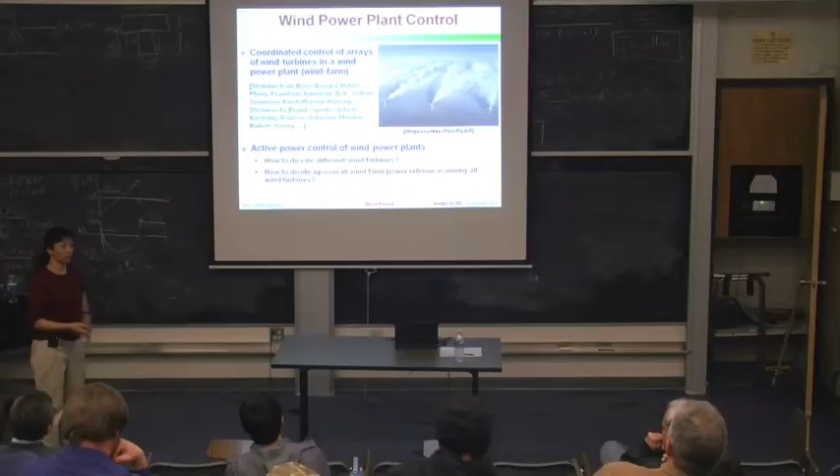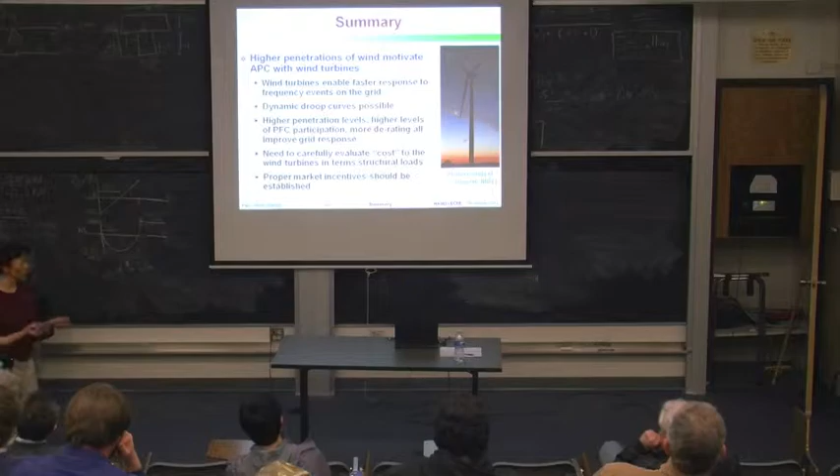So in summary, higher penetrations of wind energy on the utility grid motivate active power control of wind turbines to actively control the power output to meet grid requirements. And we found that wind turbines can enable a faster response to frequency events on the grid, that dynamic droop curves are possible for wind turbines, and that allows wind turbines to really provide this faster response and at the same time not necessarily have increased structural loads.

And we found through numerous simulations that if we have higher penetration of wind, higher levels of primary frequency control participation of the wind power plants, and more derating, all these factors tend to improve the grid reliability and the grid response. So we are continuing to carefully evaluate any cost of providing this service by carefully looking at structural loads through both simulation as well as our experimental implementation on the research turbines at NREL.

And as already mentioned, right now, at least for primary frequency control, there's not the proper market incentives in place, and that should be established. And that is, I think, an area that many systems and controls researchers would probably be interested in investigating. So other areas of future work: so far what we've looked at is active power control of wind turbines and what we can achieve by doing that without looking at demand side management or storage.

So obviously we can combine active power control of wind power plants with storage capabilities and look at what could be achieved using both of those, and possibly look at the combination of all three, active power control, storage, and demand side management, and look at the reliability of the grid that could be achieved from that point of view. And of course, there's active power control of solar power plants.